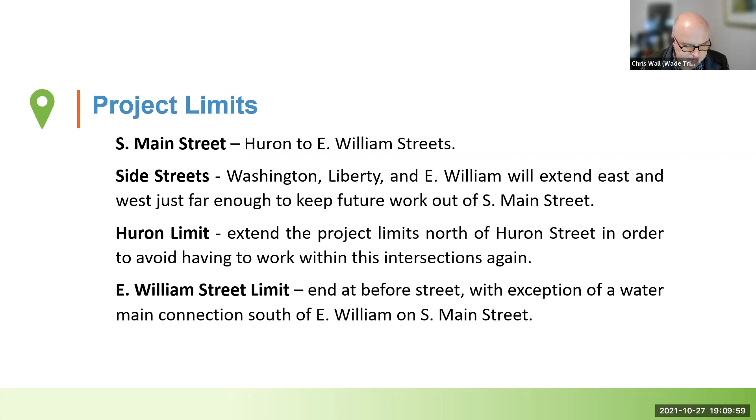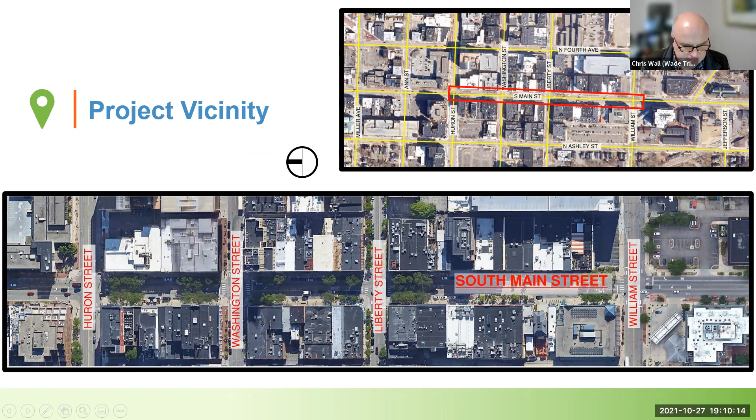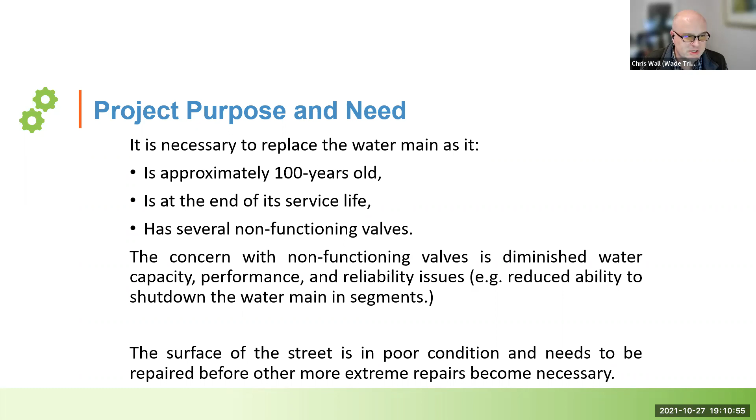Some of you may have heard that the reason and need for this project is primarily the water main. It's old and at the end of its life, with a lot of non-functioning valves. Those valves and the diminished capacity raise issues and concerns about performance and reliability. There's a big need to replace this water main to provide proper service to the businesses along the street there, and as you're probably aware, the street is in poor condition and we need to repair and update it.

Some of the key items in this project are the replacement of the 8-inch water main with a 12-inch, which will meet the current and future demands of businesses and properties there, as well as provide the fire flow needs along the stretch of Main Street.

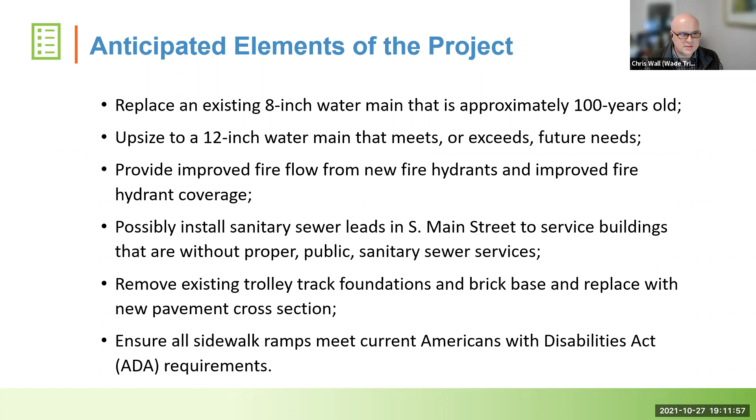We're also investigating sanitary sewer leads that might need to be fixed, and we're encountering a trolley track buried in the road there. That will need to come out, as well as some brick in different places in the road. And though we're not updating the sidewalk, there are some ramps that will have to be fixed to meet the Americans with Disabilities Act, so all users can have access to the sidewalk.

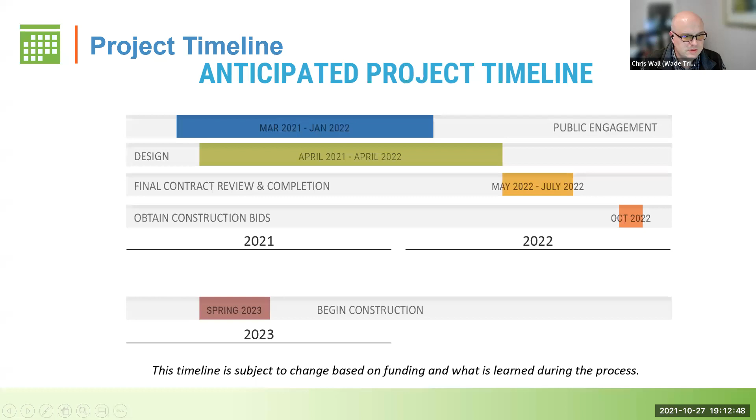In 2021, currently, we've been going through this public engagement, tracking along a similar timeline. We've also been working on design, and by the middle of next year, we plan to have the plans in place and have coordinated with the property owners, trying to minimize impacts as much as possible, so we can put the project out for bid at the end of 2022 and facilitate that 2023 construction.

What we've heard in past discussions and meetings with business owners and property owners is a list of key concerns - minimizing disruptions to the business, and we've received feedback on how to stage the project to try to minimize the duration of impacts to businesses.

We have asked about working on the weekends, and there really hasn't been a big preference - if anything, we've heard try not to work on the weekends. As I mentioned before, there are trolley tracks in there, and people are asking how much time removing those adds to the project - it's approximately two weeks.

People want to be kept apprised of the water main shutdowns as it's being installed, tested, and reconnected to the businesses - they want to be very involved in that and understand the impacts. Also reviewing the ability to still have outdoor dining, whether on the sidewalk or on the road. Those are items we're still reviewing, along with understanding the impacts to sidewalks.

For the most part, we're trying not to impact the sidewalks - we want to maintain pedestrian traffic there. But that's something we'll continue to review and engage the business owners on. Another question was whether sidewalks will be improved as part of the project. In general, it's not part of the project to improve those sidewalks - it's a component we're looking at, but it's not planned to go through and do a wholesale replacement of the sidewalks.

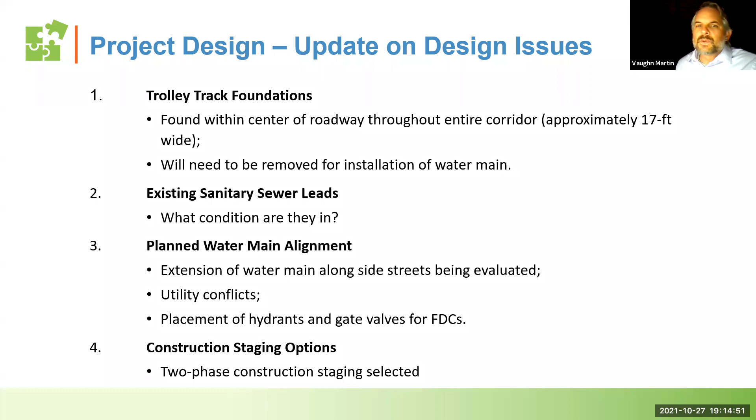Hi, good evening. So in this section, we're going to talk about the project design process and some of the things we've encountered along the way, and give an update on those. As Chris indicated, my name is Vaughn Martin, and I've been involved with the project since its inception.

So we're going to talk about the trolley track foundations. Uniquely, we discovered these were in place and verified that through the soil boring process. They essentially go the entire length of the project, right down the center of Main Street, so they just covered them up instead of removing them. So they're there, a little bit of history, and they're going to be taken out.

Then jumping in, there are some existing sanitary sewer leads that we need to verify, and that is in process - we'll talk about that in more detail. We'll also go over the planned water main alignment and show you our current layout, which isn't 100% fixed, but there's a lot of thought and design effort gone into it, incorporating both utility conflicts and hydrant placement in relation to FDCs and such.

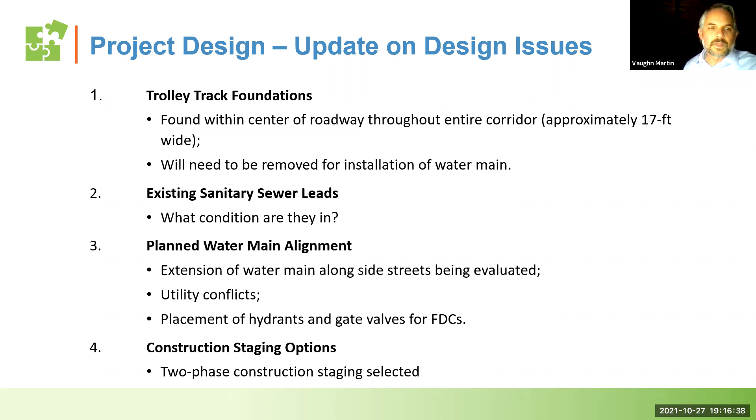And lastly, we'll discuss the construction staging options as well. We touched base on this during the last meeting, and we'll show that in this meeting. So can you advance the slide?

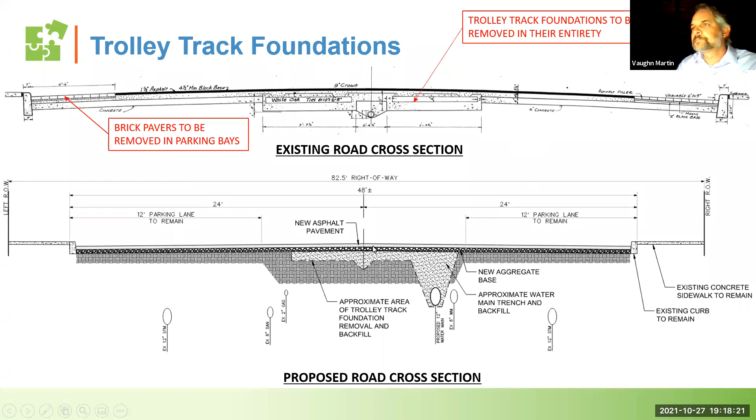So for the sanitary sewer leads, we have reviewed all of the sanitary sewer leads along the entire length of the project. There are several that appear to be unused, so we are coordinating with the city and having those services TV'd to see what condition they're in. At that time, we'll determine whether we're going to replace the leads or remove them in their entirety.

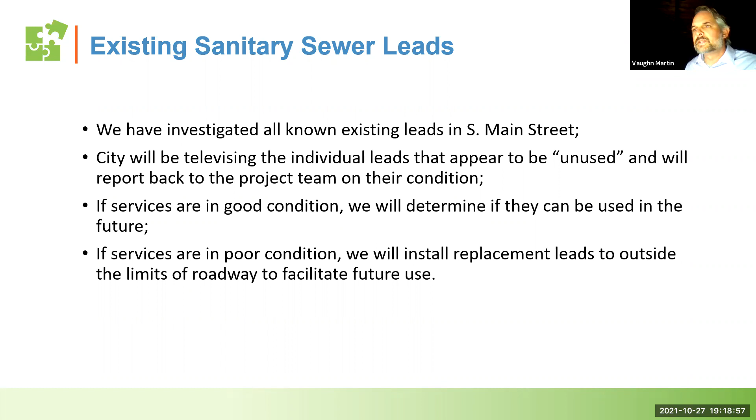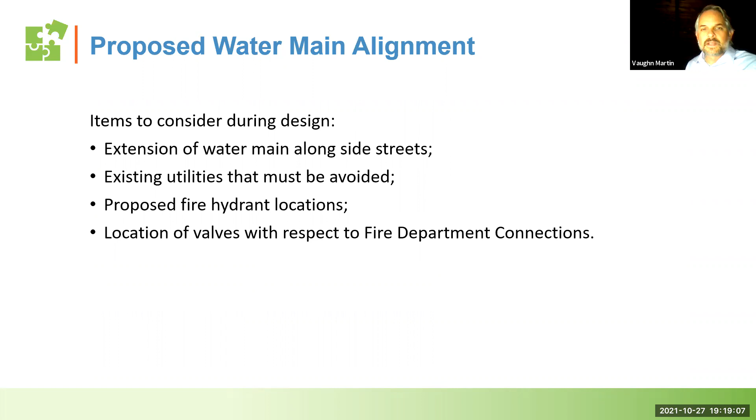Next slide. And in relation to the proposed water main alignment, Carmelle is going to hop in and discuss that.

Yeah, I just wanted to mention about the sanitary leads on the previous slide. I think we mentioned this at the past two meetings, but the reason we were investigating them is because we believe some of them are connected in the back, not typically connected to the sanitary sewer in Main Street. So we might need to install new ones properly in Main Street for those connected to the back.

Moving on to the proposed water main alignment, I'm going to go over a couple of items we've had to consider during design. Vaughn mentioned some of these: the extension of the water main itself along each of the side streets - Washington, Liberty, and Huron - existing utilities that have to be avoided, proposed hydrant locations, and the fire department connections, the FDCs, which I'll explain in more detail.

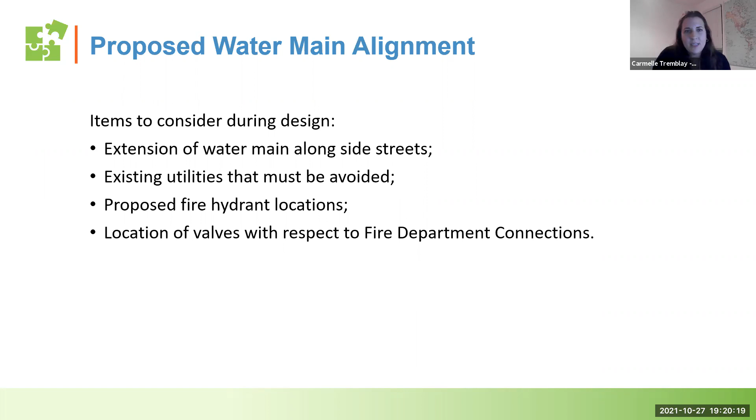Next slide, please. So this is just a graphic to show the general area we're working in. The blue area is definitely where we're replacing water main, all the way to the sides of each intersection to get outside the influence of South Main Street.

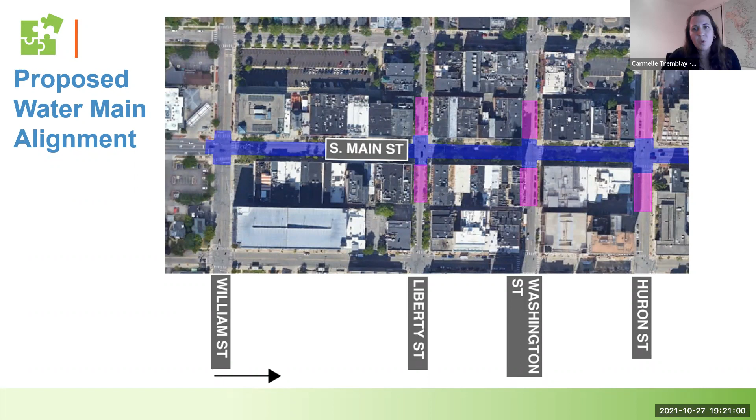What we're considering right now are the areas in pink, which extend the water main all the way to the alleys on each side of South Main Street. The water main can be replaced there, but it's a matter of balancing cost, pavement replacement, disruption to businesses, and traffic control when deciding how far to extend the water main on each side street.

The other item is the FDCs I talked about. Most of the buildings along South Main Street are commercial buildings, and many have their own fire services, so they have separate fire department connections. Each of those comes with an even more stringent requirement for distance from fire hydrants. So again, expect more hydrants and more valves along the corridor than you're seeing now.

We have to balance meeting those standards in this commercial corridor with avoiding all the utilities that are out there, as well as minimizing impacts to parking. All of that put together is what we're trying to balance to find the ideal location for the hydrants and valves.

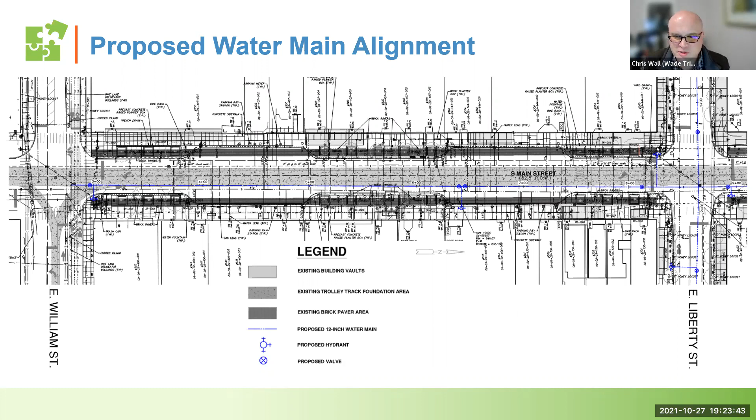Yep, absolutely. I think the main thing to say about the hydrant and valve layout is you probably won't notice the valves at all, but the hydrant layout, you probably will notice more hydrants out there than are currently existing, just because of the commercial nature of the corridor.

Moving along between Liberty and Washington, as you can see, we talked about those side street limits. We haven't shown the full extent of them yet because we aren't exactly sure where they're going to connect into the existing main. But the water main alignment along Main Street runs along the same area there, right on the edge of the trolley tracks.

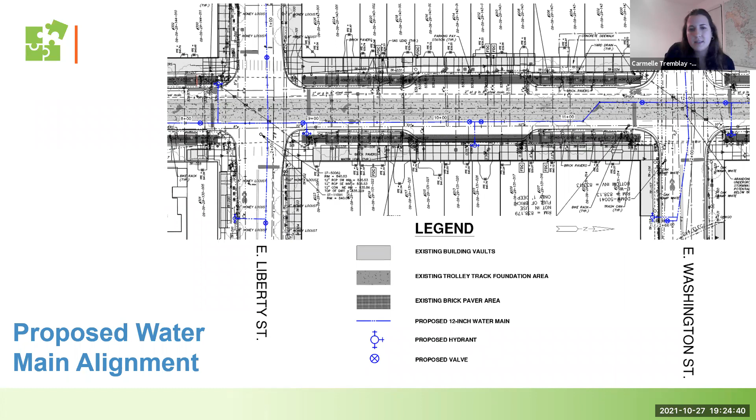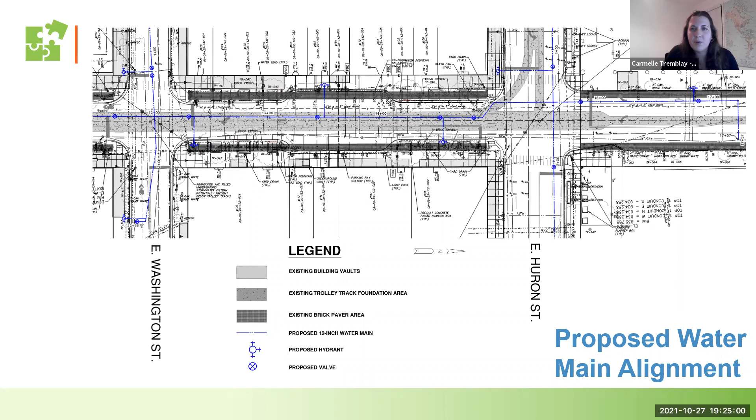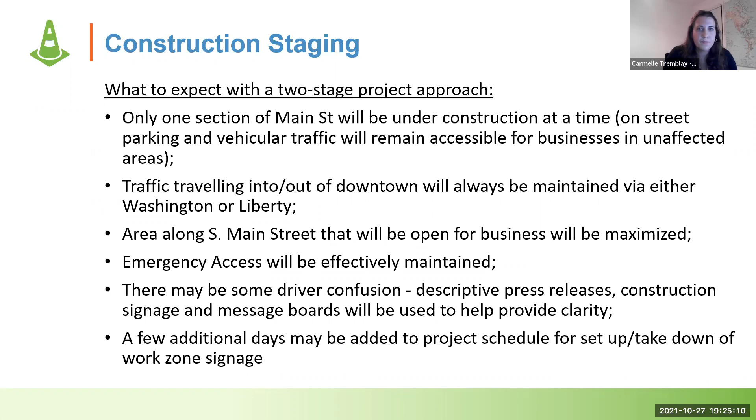I think I'm handing it back to Vaughn now. Thank you. You're muted. Thanks, Chris. Thank you, Carmelle.

So construction staging, obviously this is a big point to cover. What to expect with the project at this time, we are moving towards a two-stage approach. In previous meetings we introduced other options, and the two-stage approach seems to be the most favorable, and it makes the most sense at this time.

So the thought behind that is only one section of Main Street would be under construction at a time, and it would leave the on-street parking and traffic remaining accessible for business in the unaffected areas. Business or traffic traveling into and out of town will always be maintained via either Washington or Liberty. The area along Main Street that will be open for business will be maximized, and we'll always have emergency access to all the businesses along the corridor.

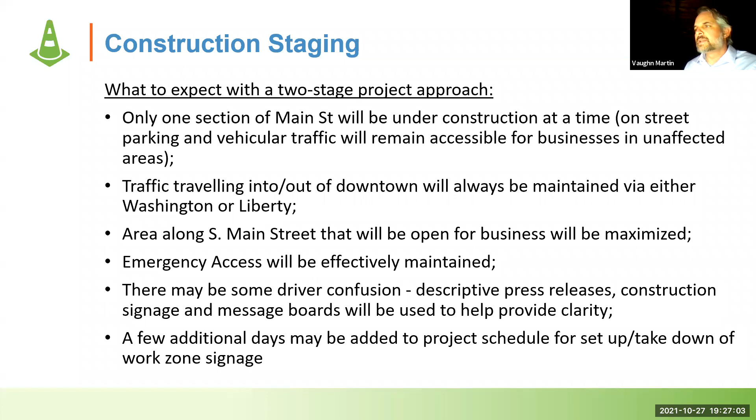Some of the things you may see: there may be driver confusion as this progresses. In order to alleviate that, there will be descriptive press releases, the corridor will be signed accordingly, and we'll utilize message boards, all of which will help provide clarity. We also have to anticipate a few additional days added to the project schedule for setup and takedown of the work zone signage.

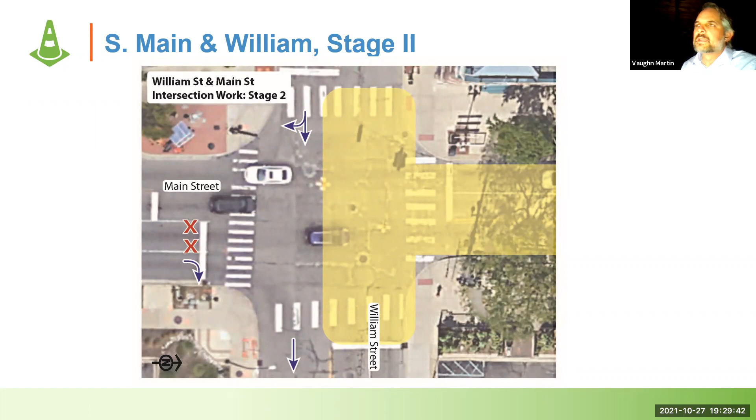So stage two of this effort, at a later date, when the section of Main Street water main is constructed all the way to or through Liberty Street, that water main will be tested and the connections will all be made. We will then have to go back out into William and shut it down in order to make the connection to the existing William Street water main. When this happens, we'll have to reduce the lane on William down to one lane, essentially one-way traffic through here. That would be a short duration for that connection—we'd be looking at 3 or 4 days maximum in order to make that connection and get out.

So moving to stage two of this: we make it from William through Liberty, and now we're on to phase two, which we will extend from the point where we stop in phase one and continue north. We will shut the intersection down at Washington Street and stop just south of Huron—those are the limits for stage two. Similarly to stage one, we will utilize both Ashley and Fourth to accommodate north and southbound traffic on Main Street. The overarching goal for these two stages is to have construction complete by the start of the art fair.

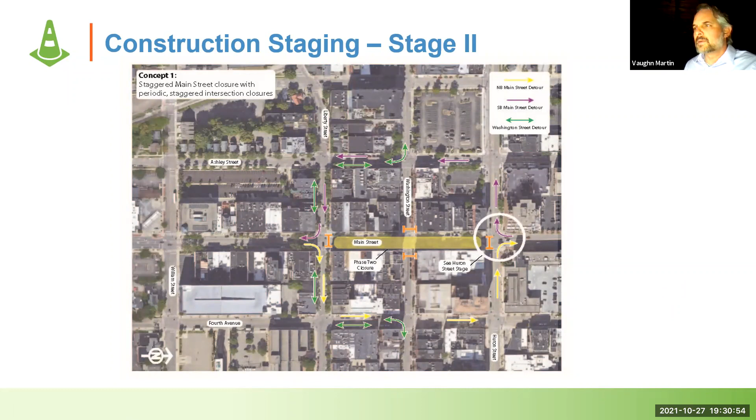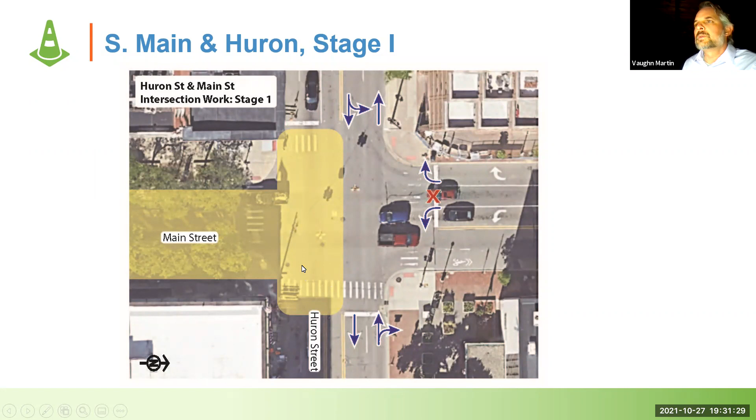So the art fair can go on as is without any other interruption from the construction component. Once we're through the art fair, we would take off on the Huron Street intersection work. This is stage one, where we will have to shut down the southern half of Huron Street to perform the water main work. We will go through that half, and then we'll hop on the other side of Huron Street and perform the water main work on that side, shifting traffic now to the southern component of the intersection.

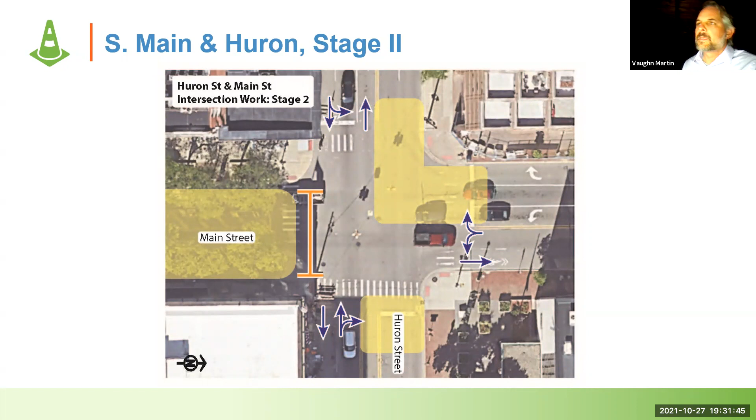And we would do the connections that we need to make there, and then we would advance to stage two of this work. In that section, we would narrow up Huron Street down to essentially 2 lanes. Well, 3 lanes are shown there, but 2 of them would be under construction.

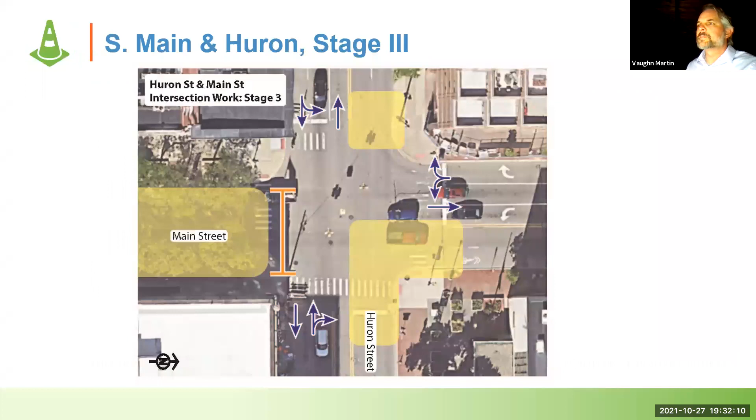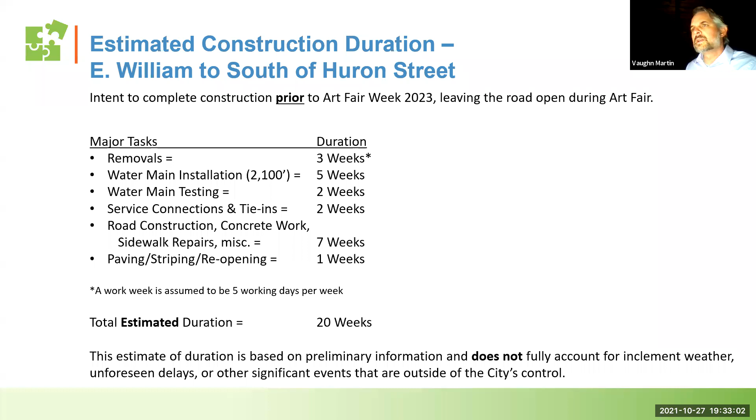So next, going through the duration—as I indicated previously, the intent is to complete phase 1 and stage 1 and 2 over the course of 20 weeks ahead of the July art fair date. We anticipate it taking us 20 weeks to get there, and it's estimated—it doesn't account for any unforeseen delays or other significant events out of the city's control. We've put a lot of thought into this time and duration, and that's what we feel, given those other items, puts us in the ballpark. It's 20 weeks.

Then the post art fair work, we'll call it—this work is going to occur after the art fair is complete. We anticipate an additional 7.5 weeks to get through the Huron Street intersection to 200 feet north, to the end of our project.

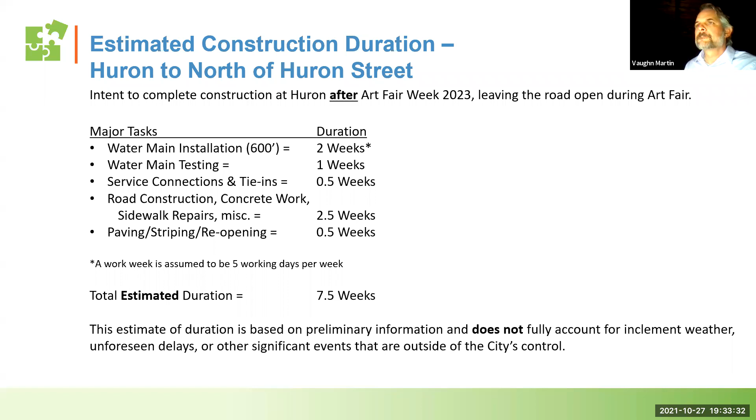So there will be scheduled water main shutdowns that will occur. We will work with all of the businesses in providing as much advance notice as possible, and we will schedule these in such a way that they are the least impactful to the businesses. In doing so, we'll take into account nighttime water shutdowns if they're necessary, and again, we'll inform you of these as well.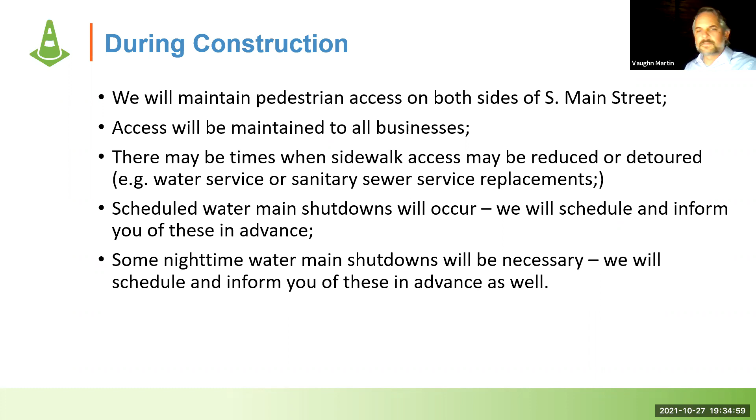So our first question: Hi, I manage the building at Conor O'Neill's Main restaurant and was asked to ask—many businesses want to delay this. Is that still possible?

And I can try to answer that. I appreciate you, Joe, providing comment and feedback like that. It's definitely something that we'll share with the staff. All the comments, all the concerns, all the questions you have are all going to be documented and shared with the Ann Arbor team. And we'll go back and see how that would influence or impact our design as we're preparing it. But in general, the project has been planned for 2023.

And so there's definitely a need to get this water main fixed. And the concern is, by delaying it a year, is that going to be beneficial? Or are we asking for a delay of a longer time frame? The more that we push this out, the more we're probably going to have problems with the performance and the reliability of the water main. So it is critical that the project get done relatively soon.

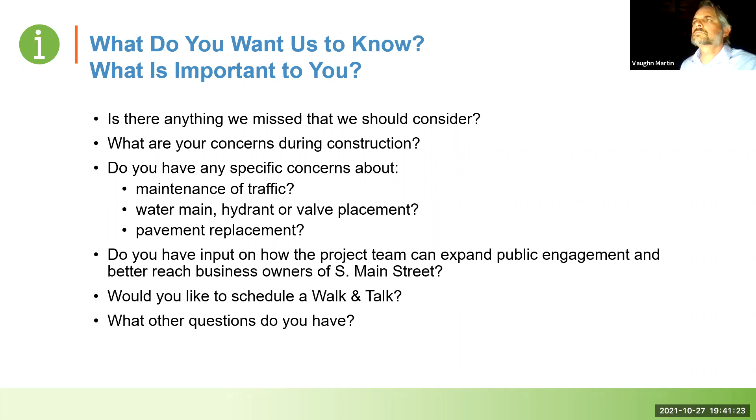We can investigate that. I think this is obviously the perfect time to do something like that. But I don't know if us doing the project is necessarily going to reduce that tap fee. My guess is that's probably something set in stone. But let us take that question, we'll go back and we'll talk to the team and see if we can't get you a better answer.

Okay, thanks. Yep, what is your business address, Joe? It's 318 through 326 South Main. So we're currently using service through 312, or 310, 314, 316.

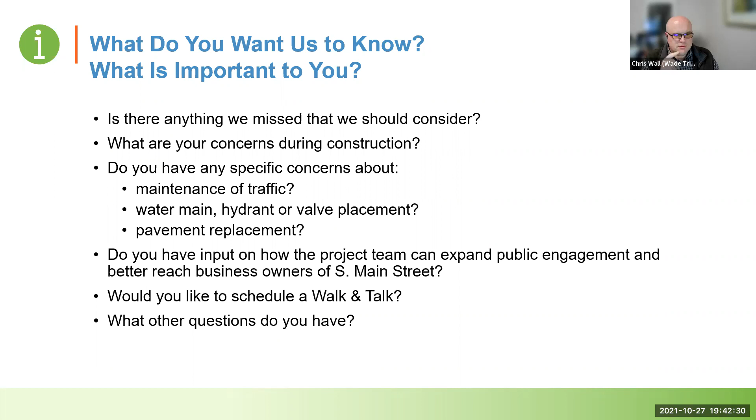And Joe, would you be interested in doing a site visit or walk and talk? Sure, so we can gather more information from you and listen to your concerns and thoughts. Sure, that'd be great. Okay. Yeah, we can. If you wouldn't mind, just send me an email and we'll set something up. Great.

Any other questions or thoughts by anyone? Yeah, hi, this is Greg. I just want to confirm I understand the proposed schedule, at least for the end down by William. If you're talking about 20 weeks prior to art fair, that means starting in February with frozen ground, right?

Yeah, we would begin the process in the latter part of February, subject to frost law removal. Once the frost law comes off, we can start excavating and the removal process. That usually happens in February? Isn't it usually later than that? It is usually later. The reason we're doing it in the segments you see is if we're impacted by that schedule, we can still complete the amount of work we can before art fair and tidy it up, and then finish it up after the art fair as well, if that makes sense.